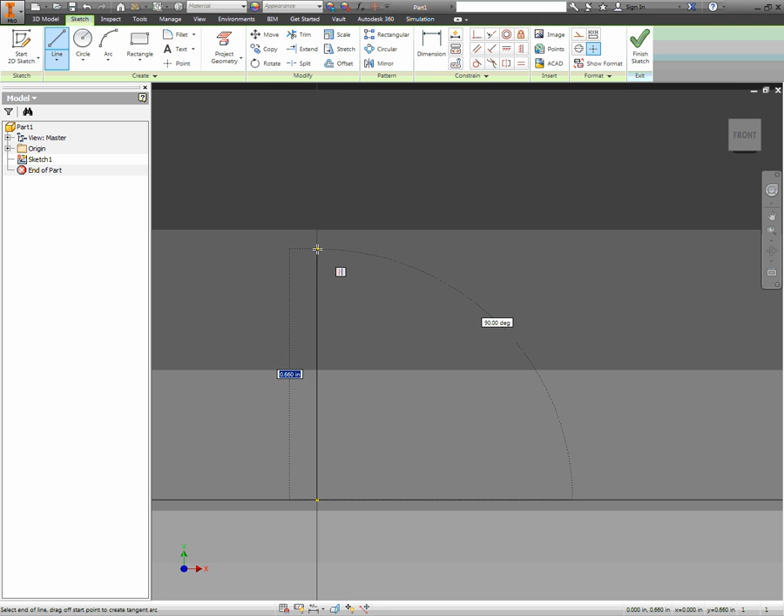So I'm just going to draw that in a sketch. So I'll start with making a sketch on the XY plane. And start with just the line tool. There's 5 tall, 3 inches here. I'll come back down to the bottom. It's 5 inches on the bottom. And then I don't really care what the angle is, I just know that those 2 lines connect.

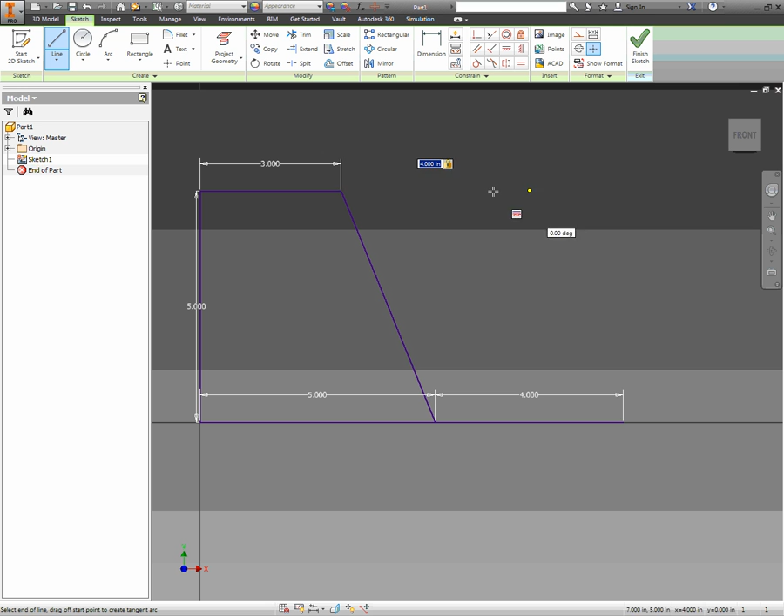And then I also know it extends an additional 4 units on the top and bottom. So I'll go 4 units here, 4 inches, and 4 inches here, and connect it. Now I've got what would be a front view of this shape, if I were to draw it as a multi-view. So I'll finish this sketch,

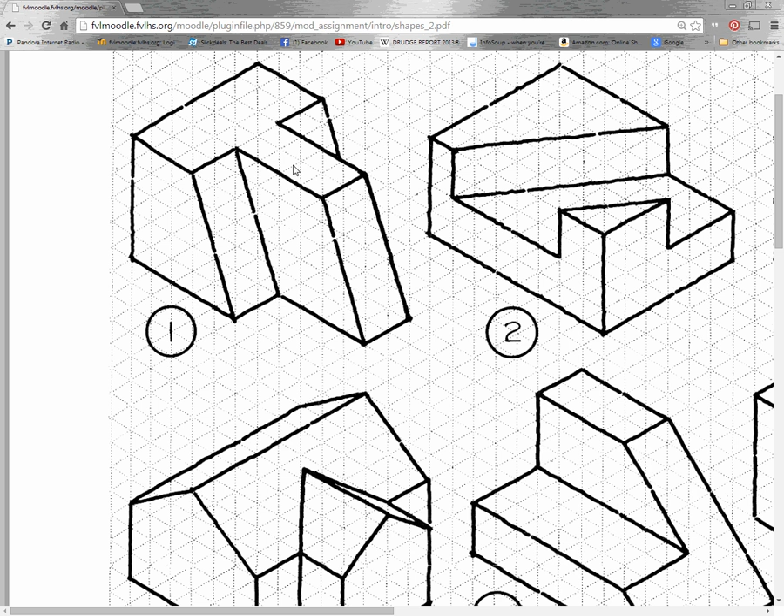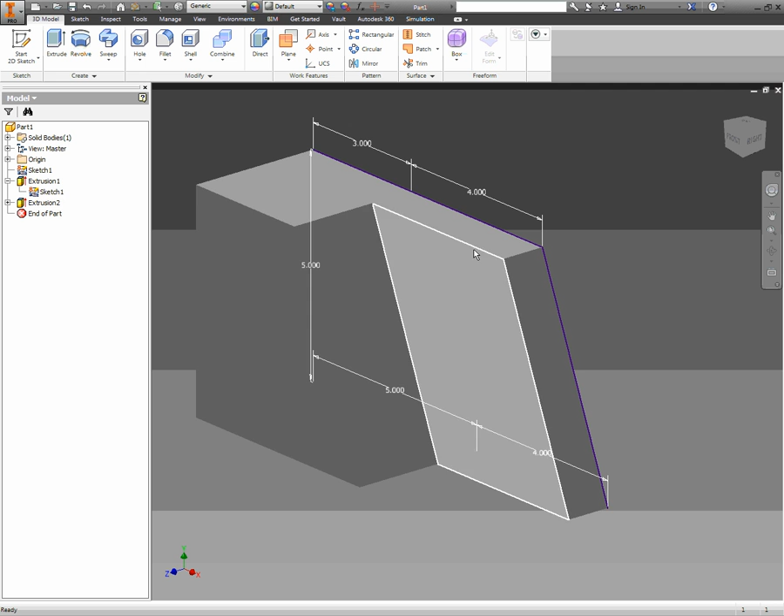and I'm going to do an extrusion. I'm actually going to do 2 extrusions, but I'm only going to extrude it as if I'm extruding from the center of the object. So I'm going to extrude this part 1 inch here, and this part out 3 inches here. So I'll do 2 extrusions. I'll do this part here 3 inches. And then remember, once you do an extrusion, it consumes the sketch, so I have to go to the browser and make that sketch visible again to do a second extrusion, but this time just 1 inch. And then I'm going to hide that sketch again.

Now I've got half the shape, and I can use a tool built into Inventor that will allow me to take advantage of symmetry in an object and simply mirror whatever geometry I have. So in the middle of the toolbar under 3D model, there's a pattern tool, and mirror is one of those options. So I'll click on that. I want to do the second kind, mirror a solid. So I'm going to click on this second button here.

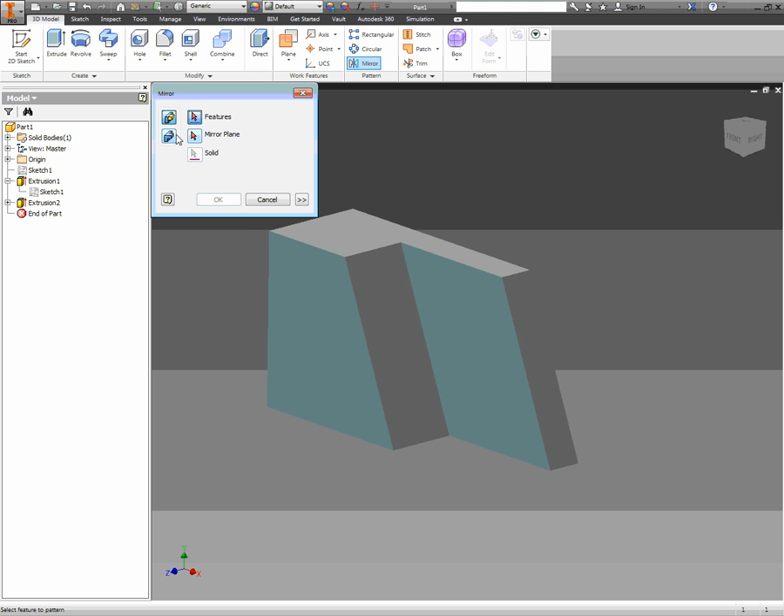And then I just need to choose the mirror plane. And the mirror plane is going to be the back side here of this object. So I'll click on that and press OK. And my shape's done. So let's go on and let's do number 4 here. I'll do a new sketch.

All right, for number 4, I'm going to start by modeling this shape and ignoring sort of this ramp piece right here. So I'm going to draw it by doing a front view again, but I'm just going to basically ignore this part here. So I'm going to draw 1 rectangle for the bottom, and then a quadrilateral here that's got a chopped off angle for the top, and then extrude these in 2 different extrusions. So that's 8 by 2, and then it's 3 tall here, and it's 6 on top, 8 on the bottom.

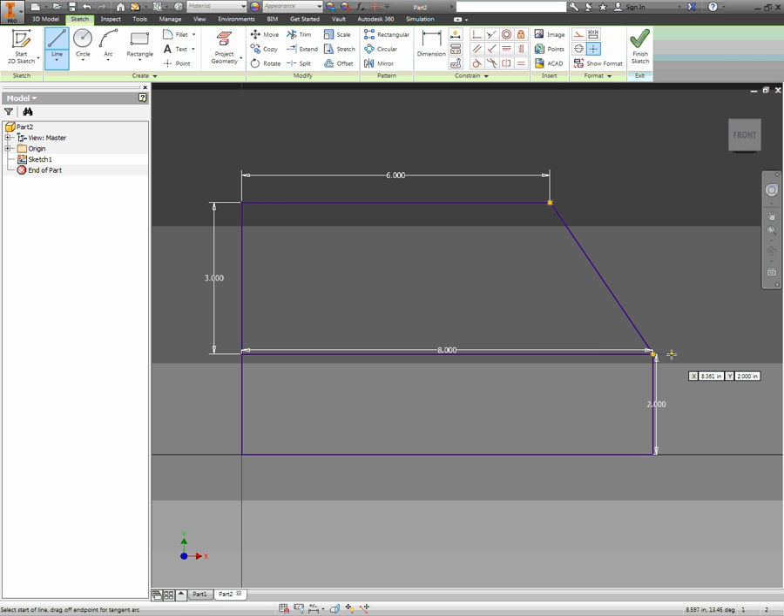So I'll start with a 2D sketch. I can start with a rectangle and make it 8 by 2. And then with the line tool, I'm going up 3, over 6, and then just down at an angle to finish it off. Then with 2 extrusions, the bottom is going to come out 5 units, the top is going to come out 2 units.

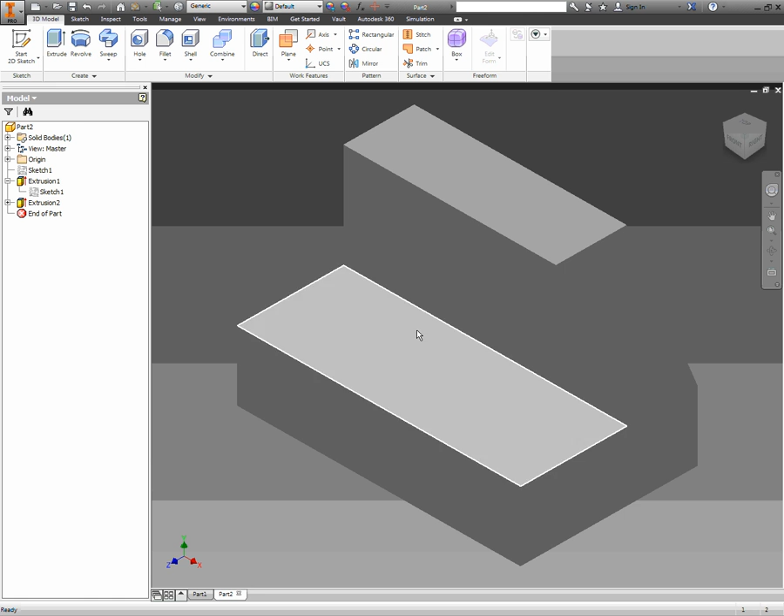I have everything except for this middle part right here. Now, drawing in this middle part is a little bit tricky with what we've learned so far because I don't have a place that I can put a 2D sketch on to extrude it. If I would put a 2D sketch here, I can only extrude up, and that's not going to work, or here it's going to go out. So I need something in here that I can put a sketch on.

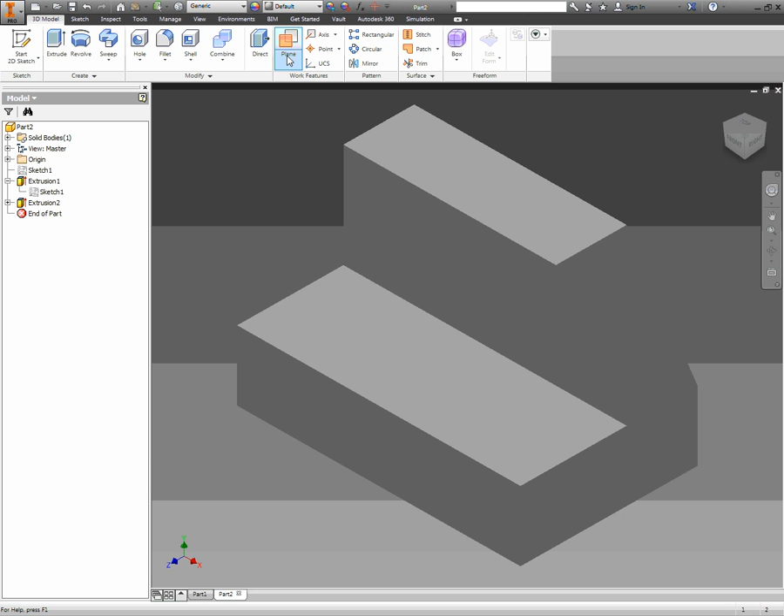So I'm going to use something called a work plane. A work plane is just, we already have the origin planes, but now we can make our own planes wherever we want that we want to put sketches on. So underneath work features in the middle of the 3D model is plane. And if you click the drop down, there's a whole bunch of different kinds of work planes. And the one I want is the second one down, offset from a plane.

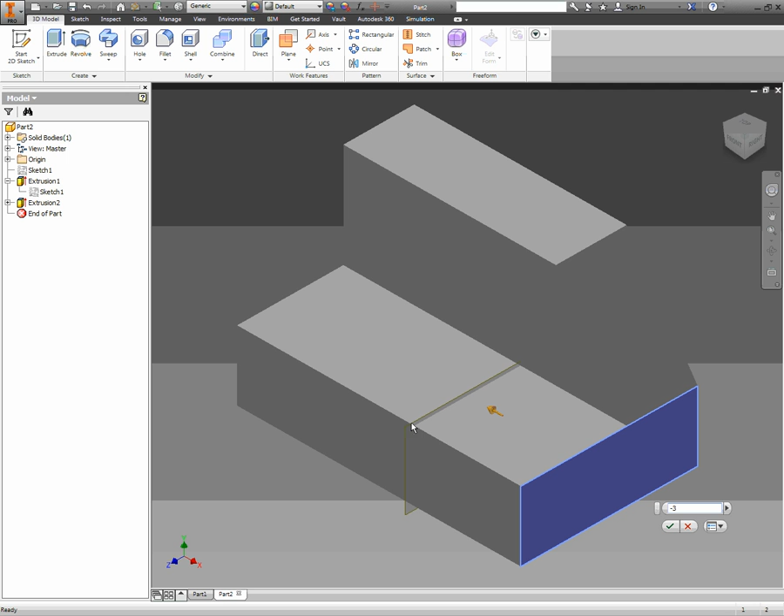So I'll click on that, and then I choose a plane as my point of reference. And I'll use this one right here as my point of reference. And then I'll offset it. And I want to offset it the distance back this feature is, which is 3 inches back from this surface here. So in my offset plane, I'm going to put 3. I think I'm going to need a negative in front of it. -3. So you can see I'm making a plane 3 inches back from this edge here.

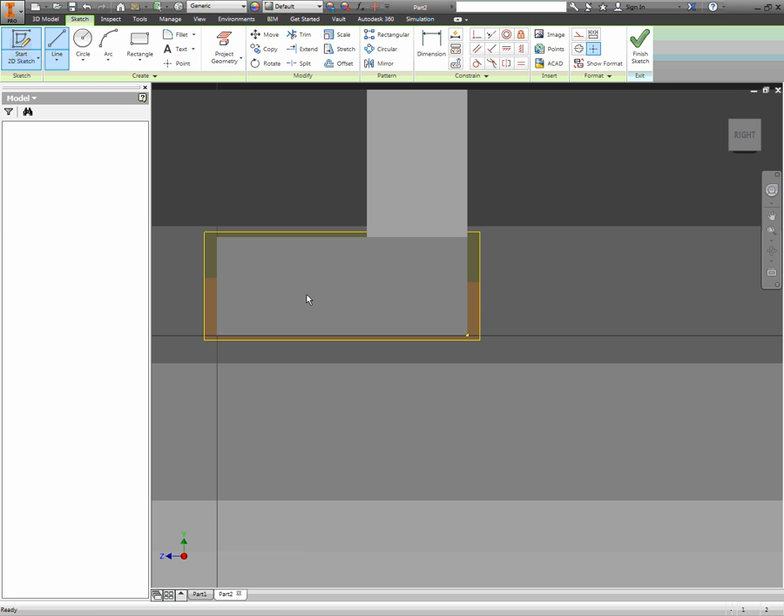Now with this work plane, I can put a sketch on it. So I'm going to go to create a 2D sketch, and I'm going to click on this plane. When you click on a plane, you always want to click on the yellow outline edge of it, and it'll highlight. It says here it's work plane 1. And now it brings me into a sketch view. So now I'll just skew my view a little bit so you can see.

I'm drawing a 2D sketch now on a plane that's not quite halfway, but part of the way through my shape. I actually want to use 2 of the edges of the shape as part of the drawing I want to make. So I can use something called project geometry. It's a big fancy term for meaning show me where these things intersect.

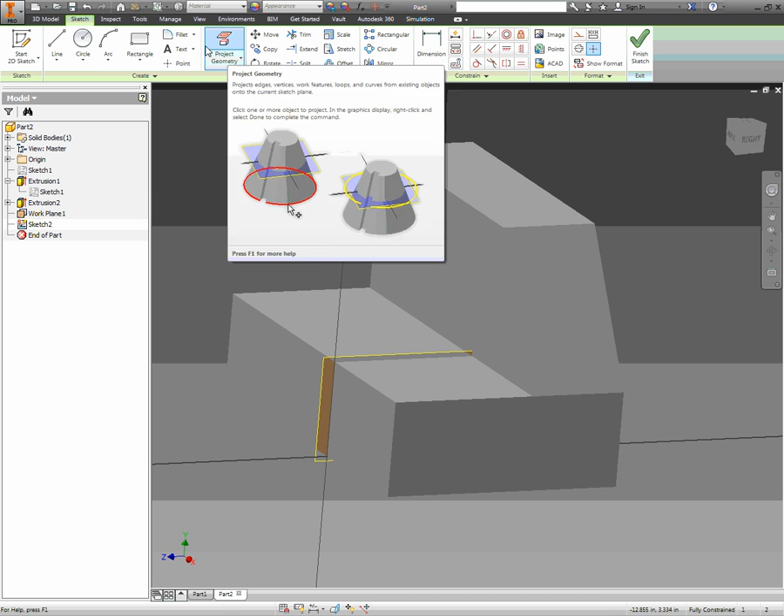So project geometry is one of the tools in the sketching panel up here. So I'm going to click on project geometry. And then I want this here and I want this plane here where they intersect. So just click on these 2, and it creates for me yellow lines in my sketch that represent where those pieces of geometry intersect my plane.

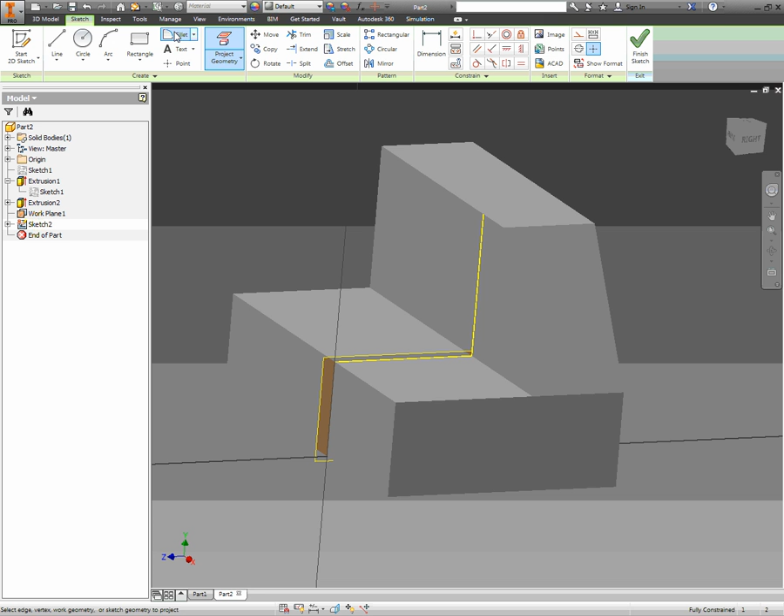And now to finish the sketch, I simply need to connect the endpoints to make a triangle. So I'll use the line tool, and I get little green dots to show me I'm snapping to those points, and I connect those. And now I've got a little triangle made here. Now I can finish this sketch, and what I need to do is then use that triangle. That triangle that I drew is this shape right here. I want to extrude that back 2 inches. So I'll do an extrusion, selecting, oh, it didn't like that.

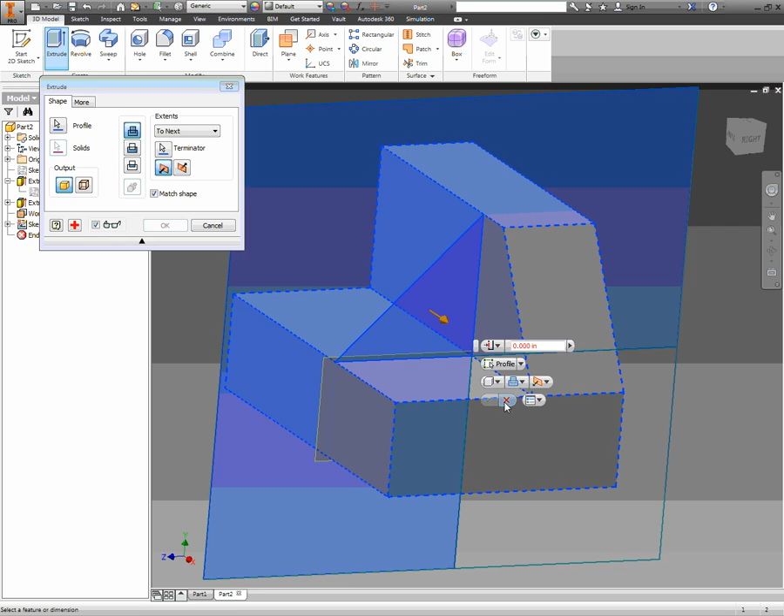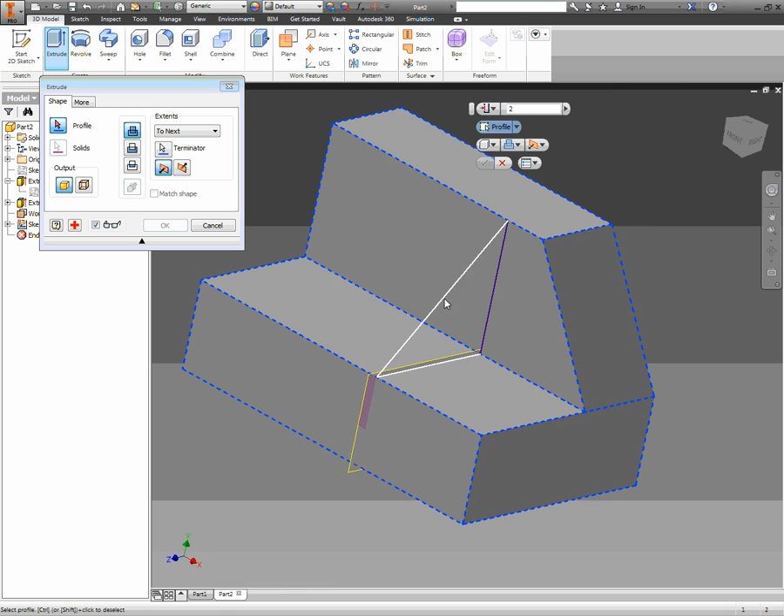All right, I'm going to go back into my sketch and trace over my yellow lines with other lines. So I'm going to trace over them here. That's going to work better. Now they're all blue. Okay. So I just traced over those yellow lines with lines again. And now when I go back and do an extrusion, I can select this little triangle here. Well, let me try that one more time. And try an extrusion. Okay, it still doesn't like it.

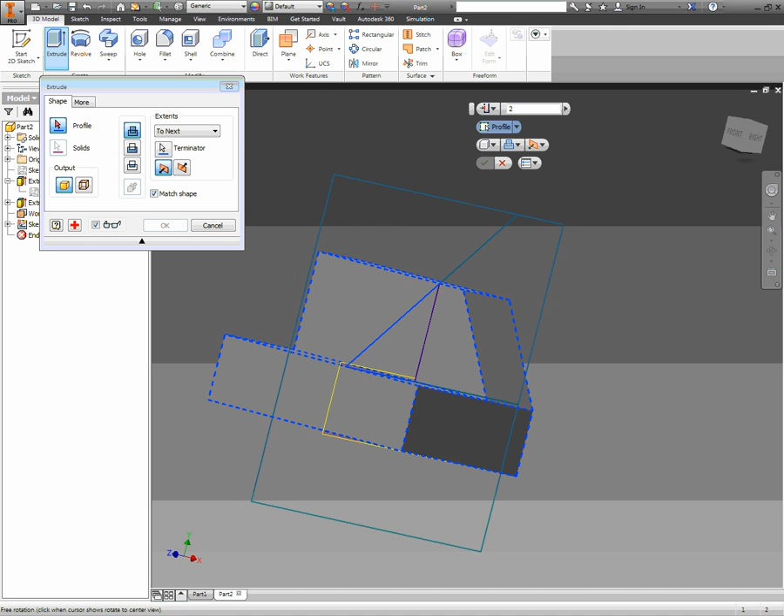So, if I get into this situation where it doesn't like it, I'm going to use Inventor to help me. You might not get this problem, but if you do, in the extrusion box, there's this little red plus here, like the Red Cross. It's emergency services. Examine profile problems, and it'll even try to fix them for me. So I'm going to click on this little red plus, and it's going to say an open loop was found. Close the loop or use edit loop, edit sketch, and project geometry.

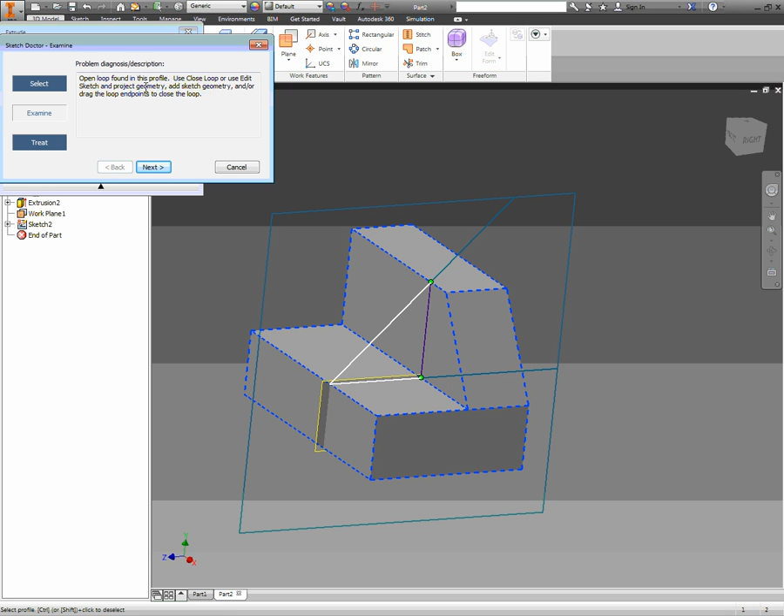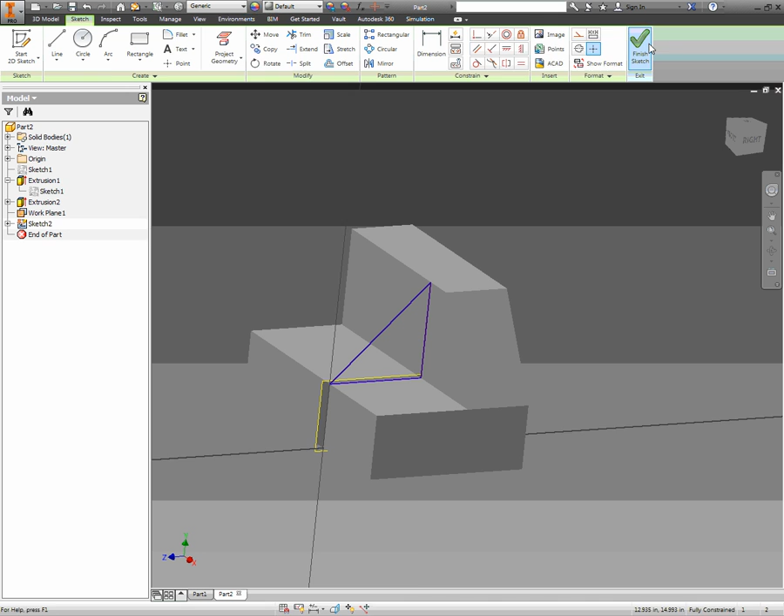So I'm going to go to next. I'm going to ask it to close the loop and press finish. I'm going to select the curve that's connected to the start end of the loop. I'm going to press yes, and I'm going to press cancel. I'm not sure if it did it, so let's try it again. No, didn't work. Sometimes it works, sometimes it doesn't. So I'm going to go back in this sketch and see if I can fix it again by simply erasing the lines that are there and drawing them again.

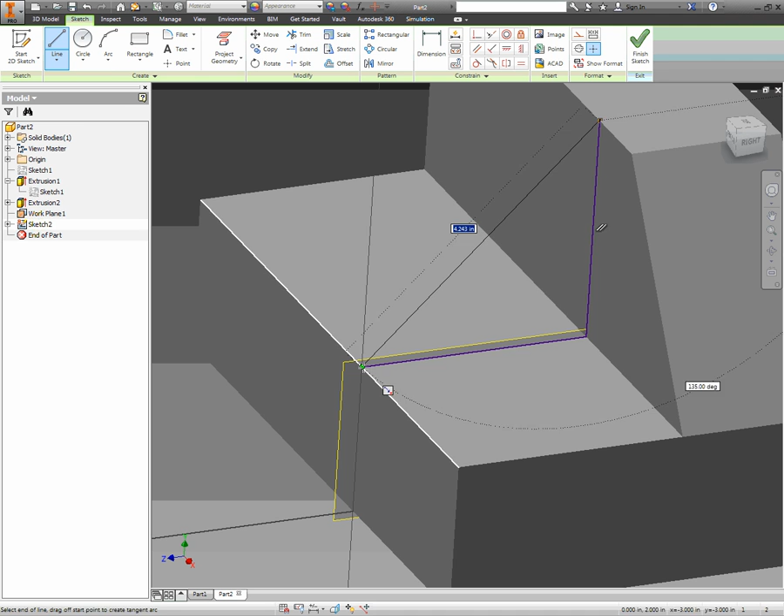All right, and let me see if that will extrude. There it will. So sometimes the easiest thing is just to erase the lines you have if you're having a problem with making a sketch or making an extrusion from a sketch. Now the only thing I need to do is change the direction, because I had my plane right here where this triangle is. I want to go 2 inches this way. So I'll change my direction and press OK.

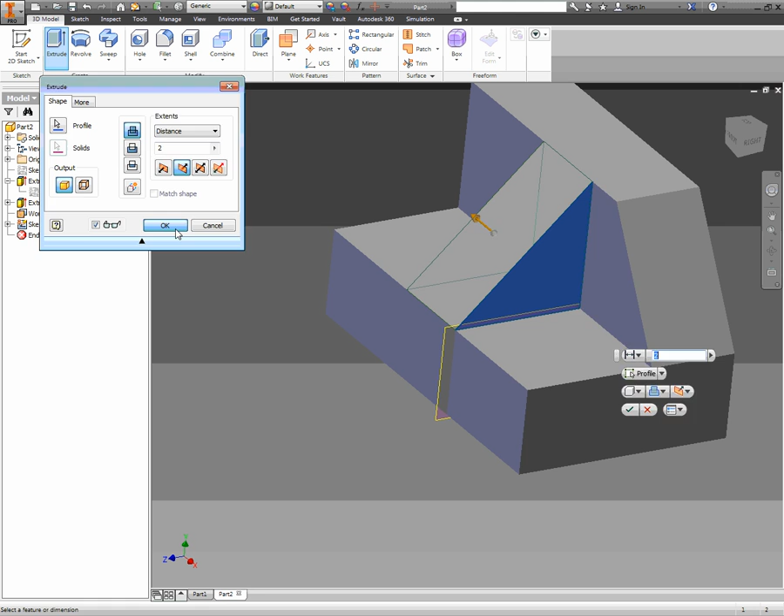I can hide that work plane just so it doesn't show up. And now this shape is finished. So that idea of using a work plane is very useful and important in doing different types of geometry, drawing different sketches in your objects if it's not on a flat surface that's already there.

All right. So for number 11, we've got an oval shape cut out here. We've got rounded ends here, and a circle that goes through here. So we've got a bunch of stuff we have to do. The way we're going to start, though, is we're going to pretend that there are no holes in it and that there are no rounded edges. So we're going to build this like it's rectangular here and like this is rectangular here.

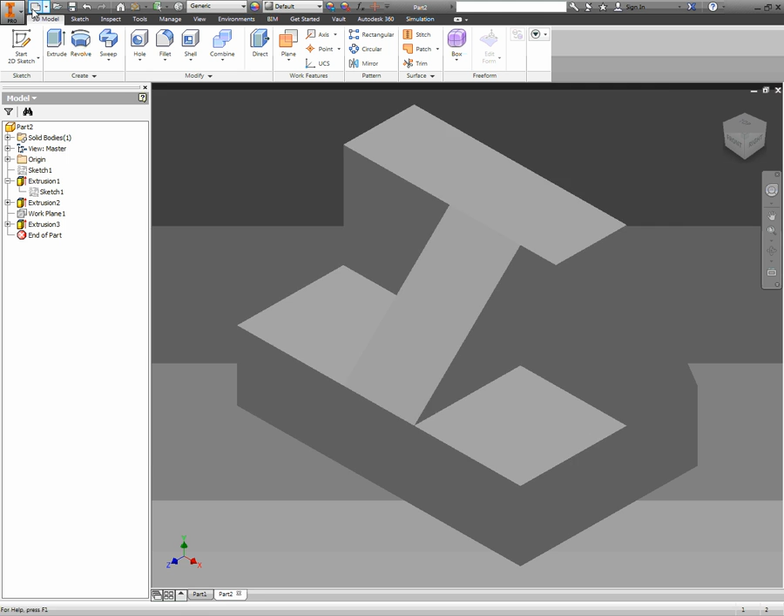Okay? So this would be at its tallest point, it's 6 inches tall and 4 inches wide, and it goes back 4 inches in depth. And here it sticks out at its longest point 7 inches, and it's 2 inches tall here. So in Inventor, we'll do a new part. And I'll do a 2D sketch on the XY plane.

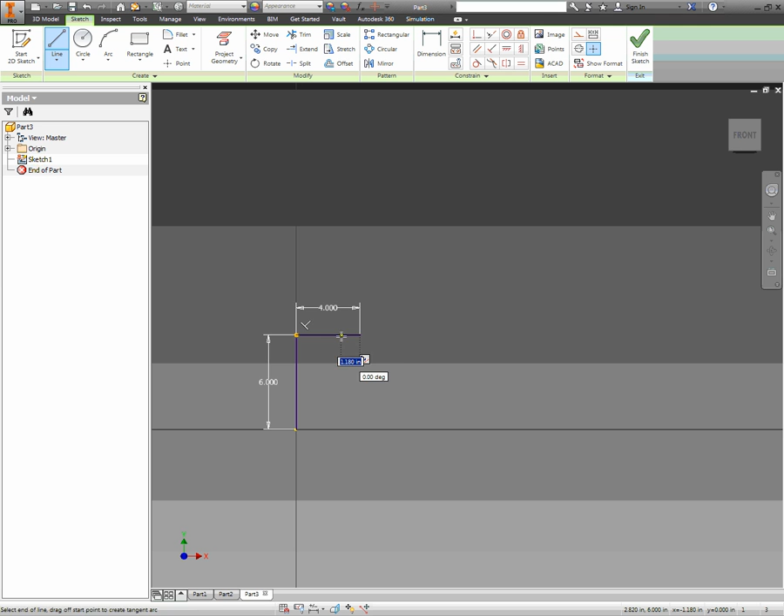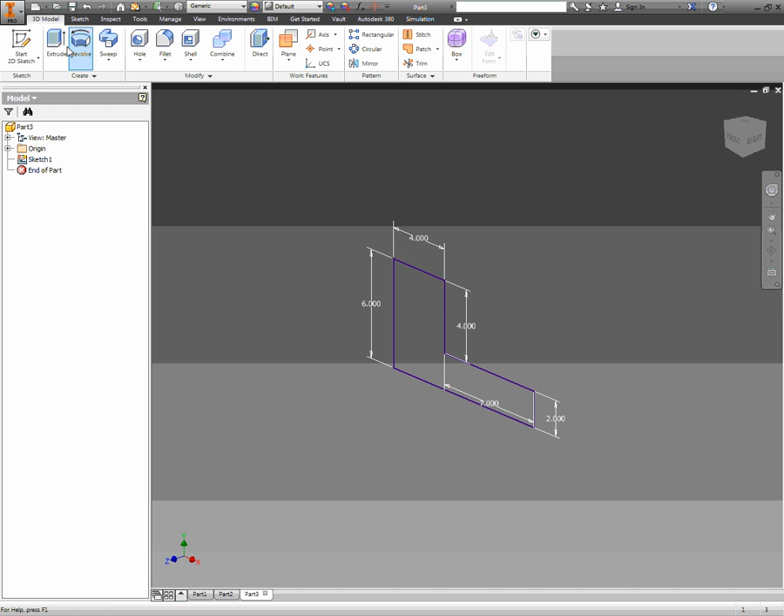And just to review those numbers, 6, 4, and 7, and 2. So I'm going to go up 6, over 4. I need 2 left, so I'm going to go down 4. 7 this direction, 2 down, and back. So the tall part is 6 inches by 4 inches, and the lower part is 2 inches by 7 inches. Then I'll finish that and extrude it out 4 inches. And now I basically have the shape without any of the rounded features on it.

Now, one way we can make rounded features in Inventor is by using something called a fillet tool. It looks like fillet, but it's not Friday and we're not going out for fish. It's fillet, and it's a round over tool.

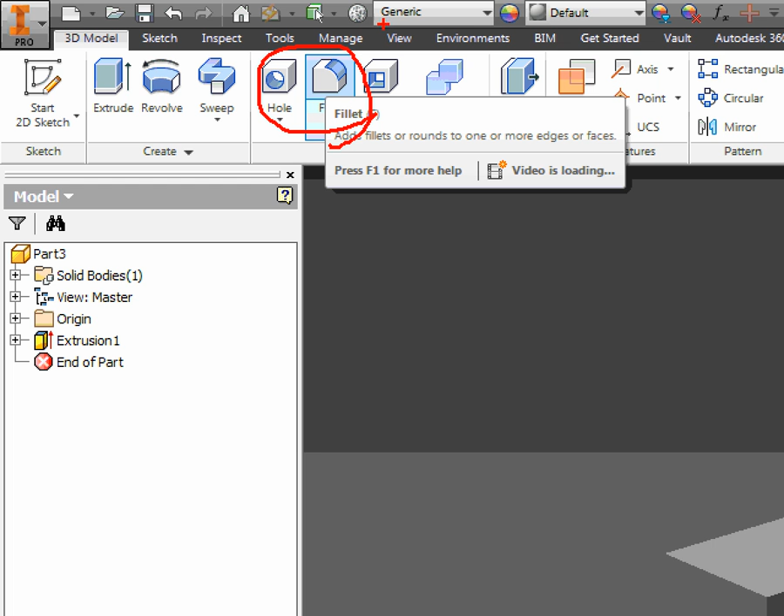If you do any woodworking, you use something like a router or a shaper to make a shape like this, and it would have a curved blade that would be able to go along the edge of a piece of material and cut a rounded curve to it. So we're going to use this fillet tool, and the thing you have to decide when you use the fillet tool is which edges you want to fillet and how big of a fillet you want.

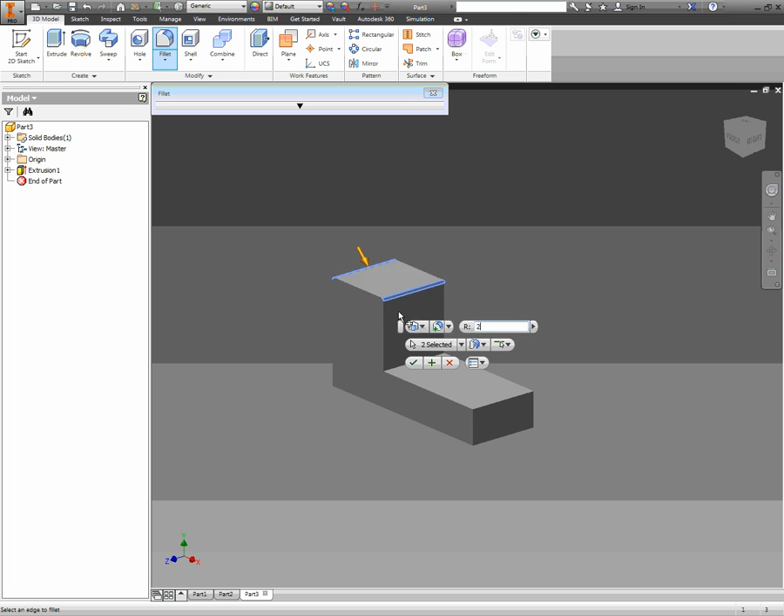Well, we want to have a 2-inch radius on this whole thing when we're done, so it goes all the way around in a half circle. So we can select both the front and back edges and set the radius at 2 inches, and it'll preview for us what it's going to look like, a nice round edge.

And there's no need to use it twice, because the front 2 edges also have that same 2-inch round over. So I'm just selecting the edges that I want. If you accidentally select too many edges, you can always hold down Shift and deselect an edge. But that cuts off and rounds over those edges.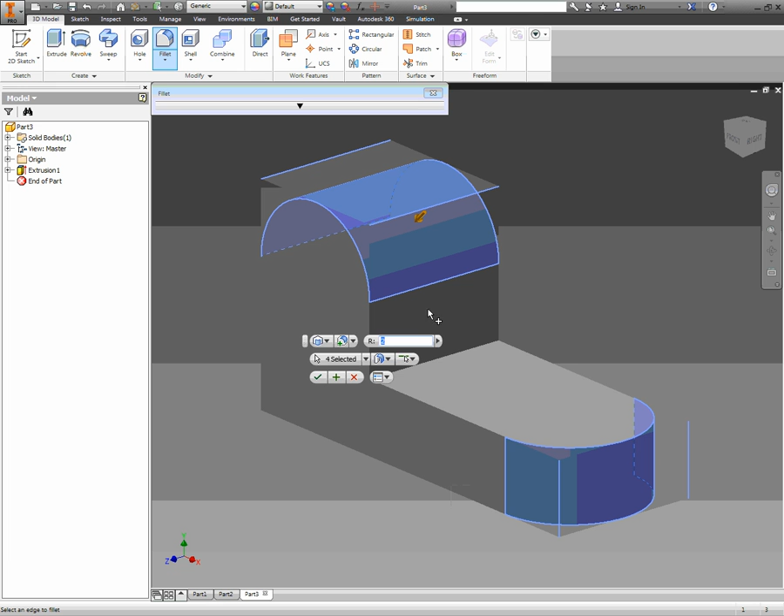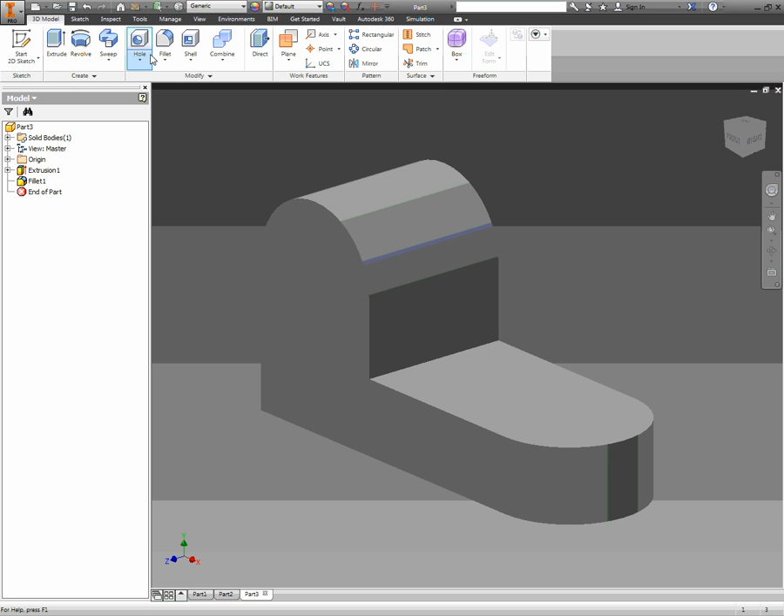And it's concentric with this outside curve, meaning that the centers are the same, and it's an even border around. So I'm going to go to the Hole tool, which is in the Modify panel. And the first thing I want to choose is the placement. And the placement, as I said, is concentric. So if I click on that drop down, one of the options is concentric. So I'll choose concentric. Once I choose concentric, I have to choose which plane I want to put it on.

I want to put it on this surface here. And then I have to choose the concentric reference, meaning give me something that's also curved that would have a center point so that I can reference from that. So I'm just going to click on my outside curve, and it snaps it right in the center there. And then the other thing is it's automatically a through all hole, which is what I want.

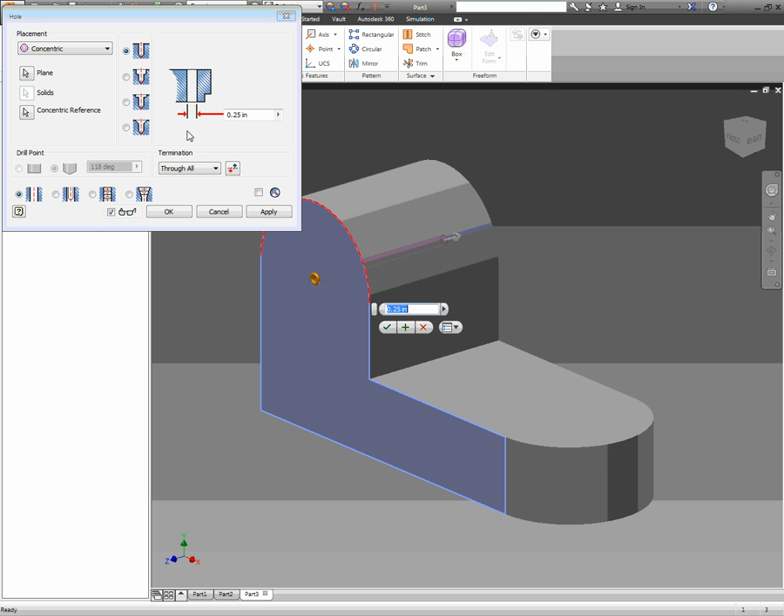Well, what's the diameter? What would be the size drill bit I would use? As I said, it's 2 inches. Probably would use a hole saw. And it now sets the hole at 2 inches, and I can press OK. I've got a nice hole that goes all the way through.

Finally, this lower portion here, I could picture this as being a bracket or something where some through bolts would go through here, but it has some adjustment space. It's this oval shape, a true oval. Difference between an oval and an ellipse. Anybody know what the difference between an oval and an ellipse is?

Well, an oval has semicircle ends and flat sides. An ellipse does not have flat sides. It's curved all the way around. So instead of using the hole tool, there's no oval hole tool we can use. We're just going to draw a sketch that's going to match this shape and then extrude it cut through.

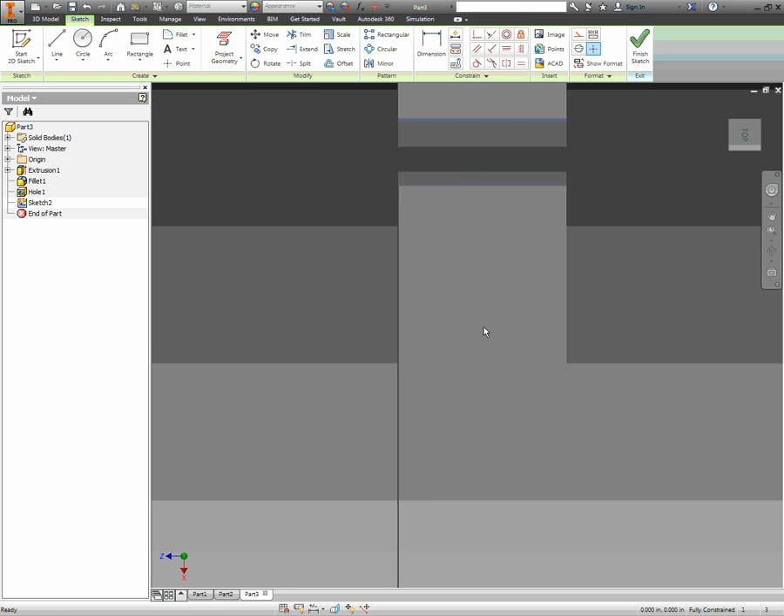So I'm going to make a new sketch on this surface, and I'm going to use the line tool. Now, you might ask yourself, or you might ask me, how can you use the line tool? We have to make curved edges. Well, there's something really cool about the line tool. Yes, if we click with the line tool and just make a straight line, it just gives us a straight line, which I do need for each side of my oval.

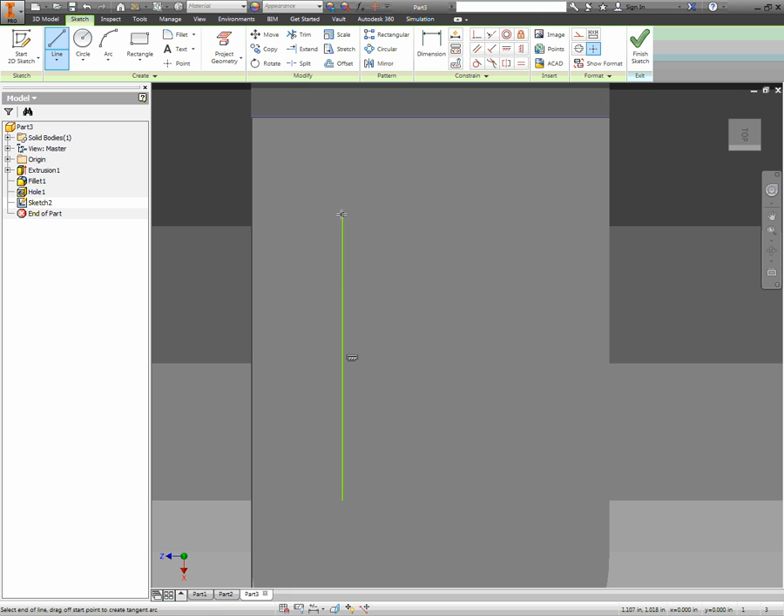But then, if we hover over the point where we stopped, you can see that the dot turns gray. And then instead of clicking and letting go with the mouse button, if you click and hold the mouse button down, it will turn into a tangent arc tool. And right from the line tool, you can then do an arc that's attached to your line. So I'm going to do a semicircle here with that tangent arc tool.

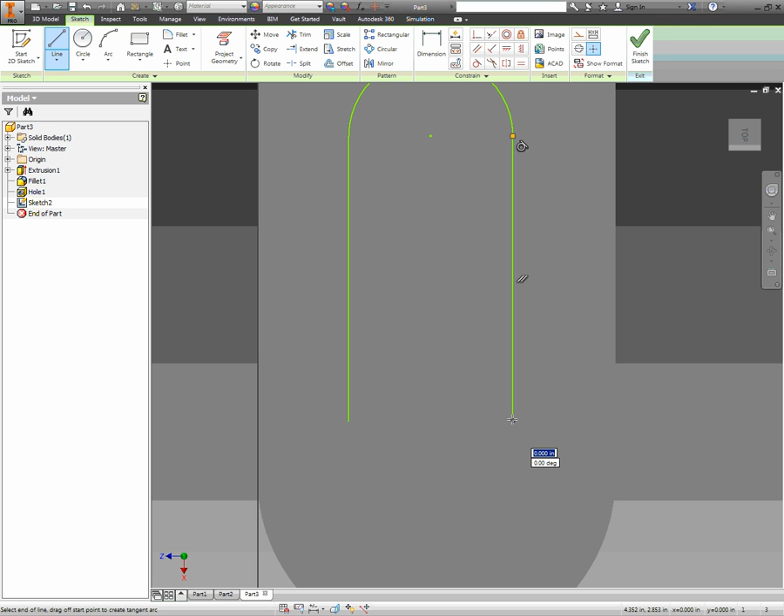I'm going to come back with a straight line that matches up across my way there. And then again, starting in the same place I ended my line, hold down the mouse button. I'm going to pull down to start the tangent arc in this direction. And I can come around in the semicircle to match up to the other side of my shape. Now, if you successfully do that shape, congratulations. However, it's not constrained because it's all green there, and it's not in the right spot nor the right size. So we can constrain it.

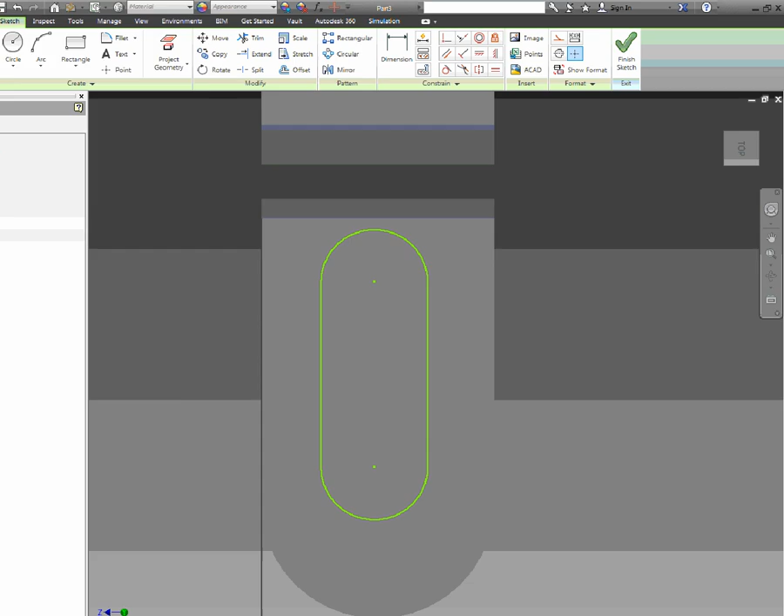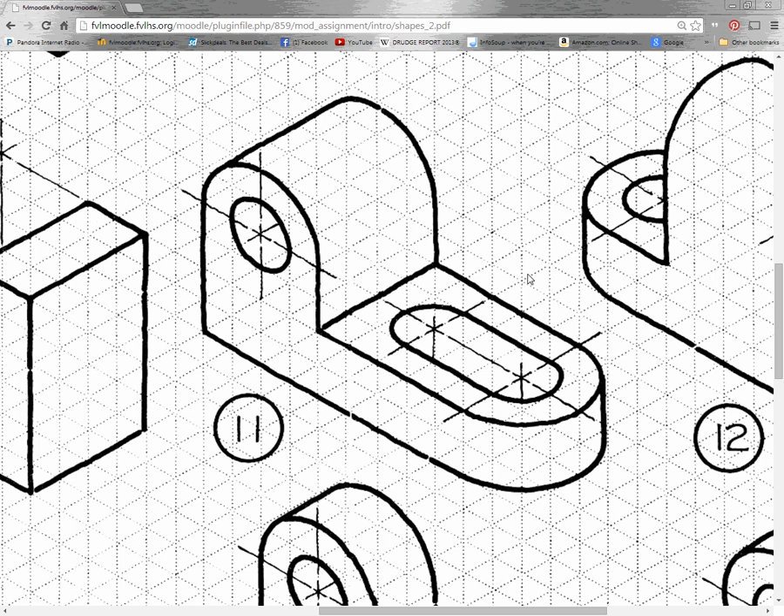Then the other thing I can do is set a dimension for how far apart these lines are. And looking at the drawing, they're 2 inches apart. So I'll just click on both lines with the dimension tool and make those 2 inches apart. And I'm almost done, but I haven't determined how far apart these circles are or how long the straight sides are. Looking at the drawing again, the straight sides are 3 inches long. So I just have to select one of them and then set it as 3 inches long, and then my sketch will be fully constrained.

I'll finish this sketch, and then I can finish the model of this shape by doing a cut extrusion that'll go all the way through, and it's going to go right through that bottom when I press OK, and my piece is done.